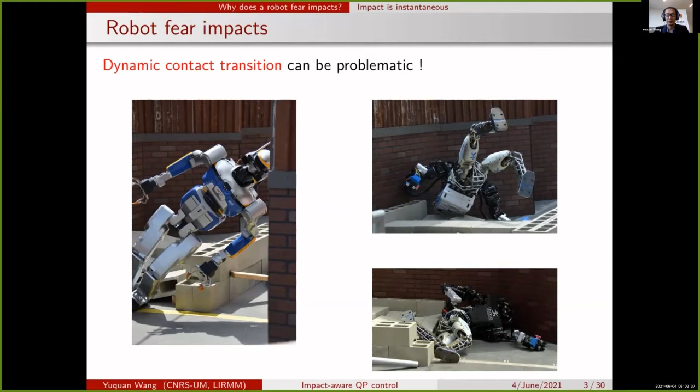Hence, the state of the art is more like this: the robot would establish contacts carefully with close to zero contact velocities, and sometimes with soft materials between the robot and the rigid environment.

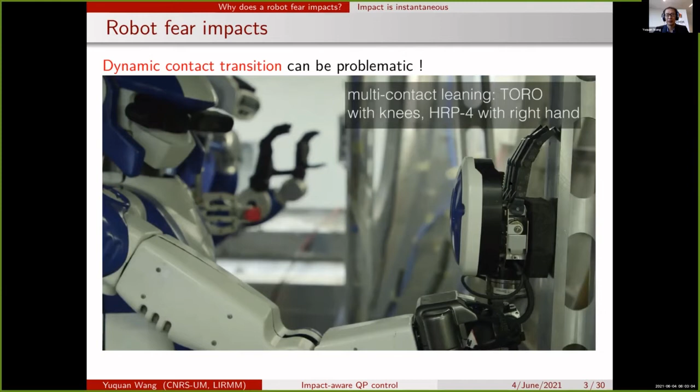So why do we need the soft materials between the robot and the rigid environment? We can have a look at what the Journal of Impact Engineering says. In this simulation example, our conclusion is that impact is too fast to be compensated. Within this time scale, we can tell from the X label, it is actually within 1 millisecond.

So if the contact velocity is up to 1.17 meter per second, for plastic materials, the peak force can reach up to 4.5 kilonewton. This is forbiddingly high. And this is in simulation.

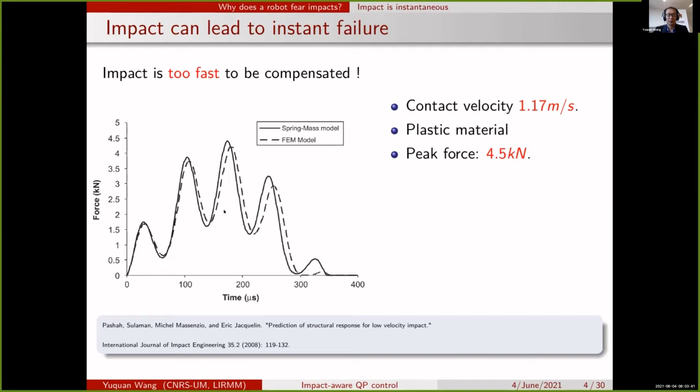So let's have a look at what's going on with the real experiments. We didn't try 1 meter high contact velocity, but only 18 centimeter per second contact velocity. But still, we received 120 Newton peak impact force in the experiments. Over 10 iterations, we can see that the force profiles are consistent.

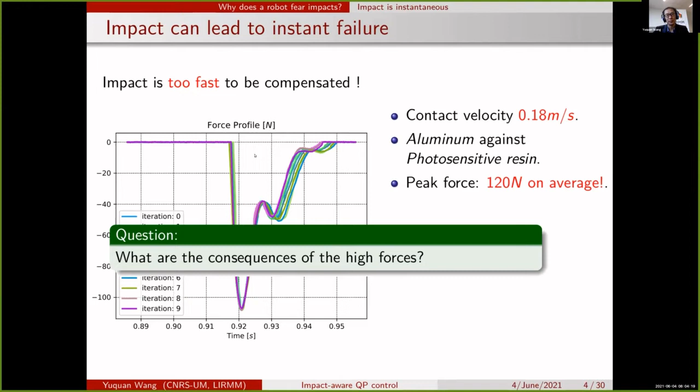So these peak forces, how harmful are they? What are the consequences of the high forces? Basically, our conclusion is that these forces will damage hardware, for instance the electric motors, the fragile harmonics between the gearbox and the motors, and then the contact outcome is not determined. In this case, the impact leads to the over-torque of a joint, so the robot state immediately becomes infeasible.

This is typical when the environment is rigid and the contact location is unknown. And when we have underactuated robots, we also need to consider the standing stability, otherwise the high impact velocity would lead to instantaneous falling. In this case, the contact velocity is 0.5 meter per second. We did not put this in practice, otherwise we would for sure damage our humanoid robots.

So due to these reasons, the state-of-the-art typically avoids impacts or uses close to zero contact velocities. Hence, our objective is to control the impact process so that the controller knows exactly the outcome of the impact dynamics.

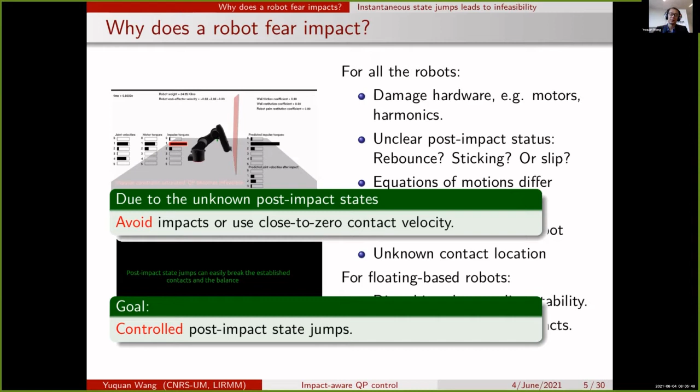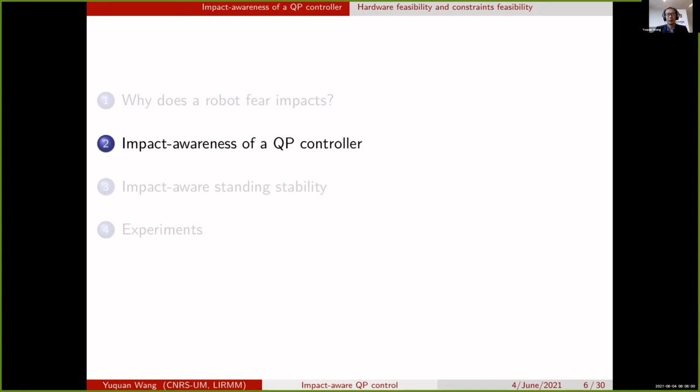Then, in the next section of the presentation, I will introduce you to how we propose to do it, and what are the details of our method.

So to quickly recap, for hardware feasibility we consider the limited joint velocities and limited joint torques. And for underactuated robots, such as a humanoid or a quadruped, we also need to address the standing stability. For all these aspects, we can use modular constraints to describe them. Basically, these joint velocity constraints, joint torque constraints, or standing stability constraints would reflect reality. And thanks to the modularity of the constraints, we can seamlessly integrate these aspects into our state-of-the-art reactive controllers.

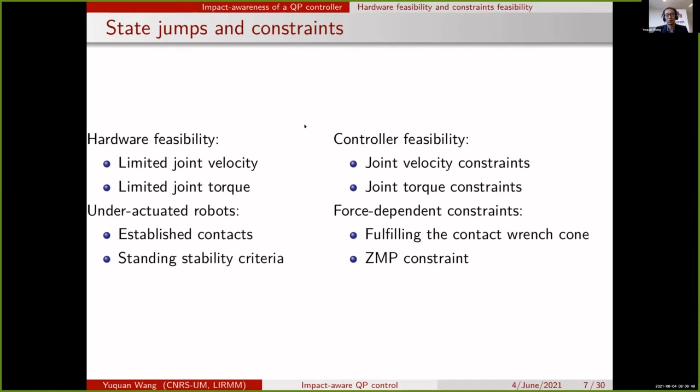However, these constraints do not consider impacts explicitly. So we propose to, on top of these constraints, constrain the post-impact state. Say after the impact, the joint velocity, for instance, needs to be below certain bounds.

We can simply rewrite the post-impact state as the pre-impact state plus the state jump. The pre-impact state is a function of the controller decision variable. For instance, the most popular choice is the joint acceleration.

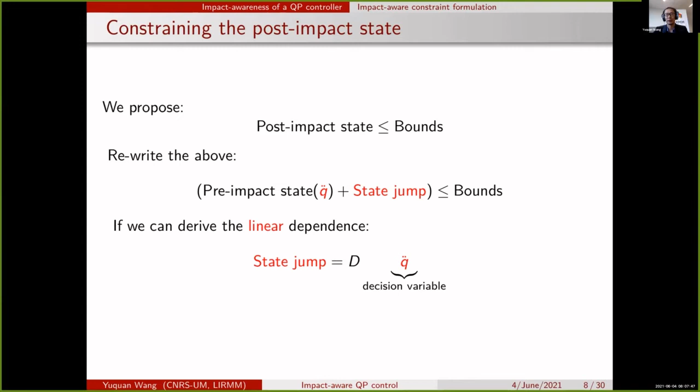Our goal is to rewrite the state jump also as a function of the decision variable, for instance, joint accelerations. If we can manage this, the impact process will be a controlled process, and all impact-induced state jumps will be known by the controller and handled consequently. Hence, the QP controller will be impact-aware in the end.

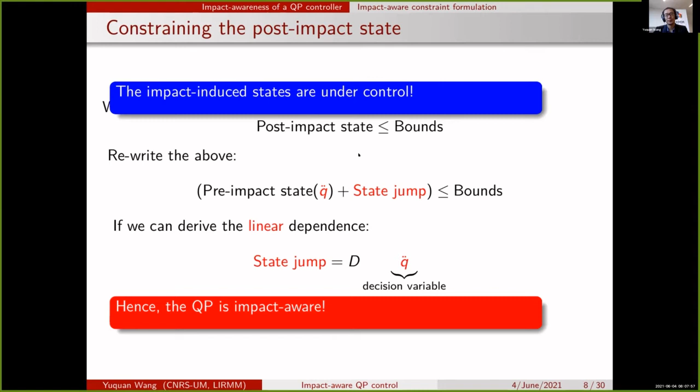So let's examine how we derive the state jumps as a linear function of our controller decision variables. Let's have a look at this simple example. Given a contact surface, which is the green area, we have the pre-impact velocity, which is the black arrow, and the surface normal. Then we can easily derive the post-contact velocity using the kinematic restitution.

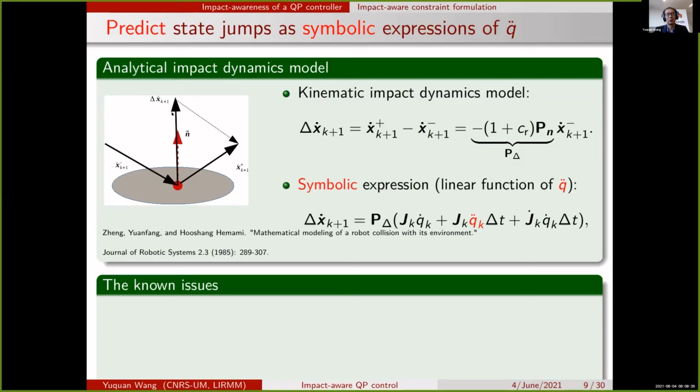Taking the difference of these two arrows, we get the contact velocity jump. Based on this simple relation, multiplying by the equivalent mass, we can conclude the impulse.

Despite this approach has been adopted for many applications in one way or another, typically in the working community, this approach has well-known issues. For instance, in this example, we used a Panda robot to impact a planar surface, so we only have the orthogonal contact velocity and zero tangential contact velocity.

So in this case, because we have zero tangential components, the impulse should have zero entries, should have only non-zero entries along the contact velocity. Whereas these products of the Jacobians and the inertia matrix in practice have non-zero off-diagonal elements. So for this Panda robot configuration, we got these values, and this means that this multiplication would lead to a 3-element vector where all the elements are non-zero.

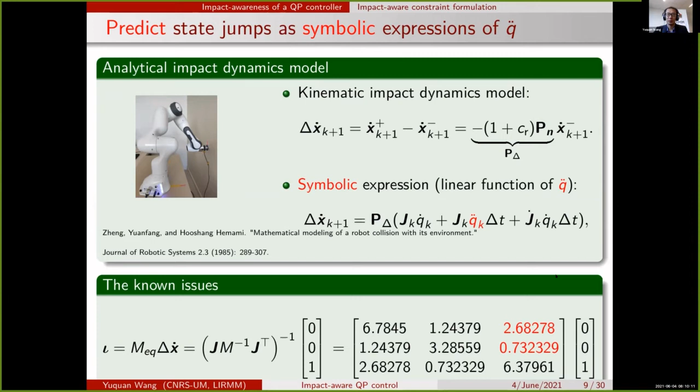So this is obviously not true and not desired. These limitations motivate people to develop more advanced impact dynamics models. For instance, back in 2000, Stewart already discovered these issues and summarized them in his seminal paper. These issues have also been recently reviewed by Featherstone.

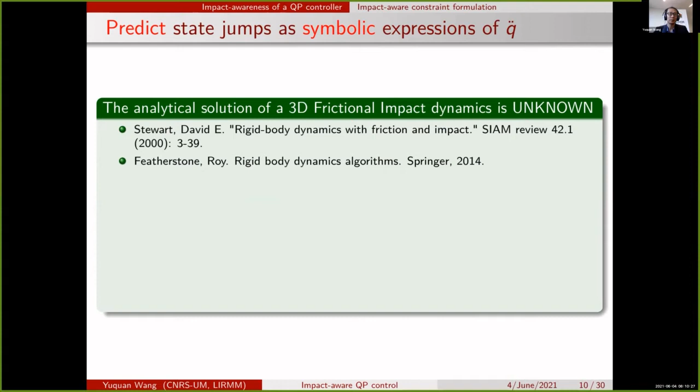As presented by Yan Bin in the morning, he developed the graph-based approach for planar impact models and three-dimensional impact dynamics models. Despite the planar impact dynamics models having been successfully applied on robots, with an analytical solution, the three-dimensional analytical solution is still not known. This is double verified by Michael Posa and David Remy. Especially for legged robots, the impact or collision outcomes can be ambiguous and the result may not be unique.

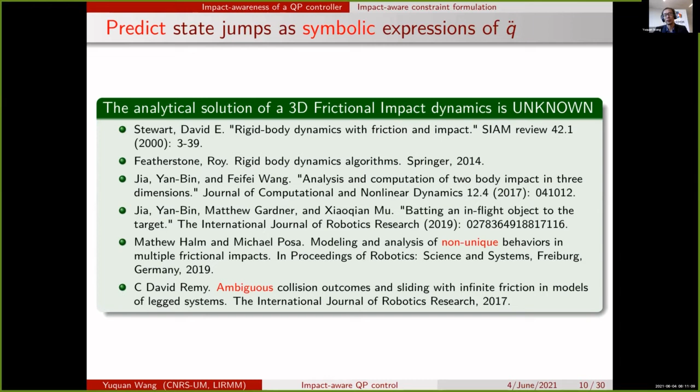Whereas, despite these difficulties, we can choose one's favorite impact dynamics model to write the state jump as a function of the controller decision variable. So let's have a look at a more intuitive example.

For instance, the joint velocity constraint. Typically, we restrict the joint velocity below certain bounds, and the joint velocity can be rewritten as a pre-impact joint velocity, which is a function of the joint accelerations, plus the state jump.

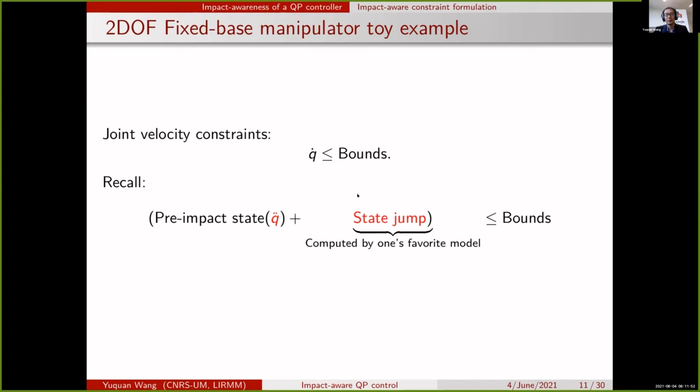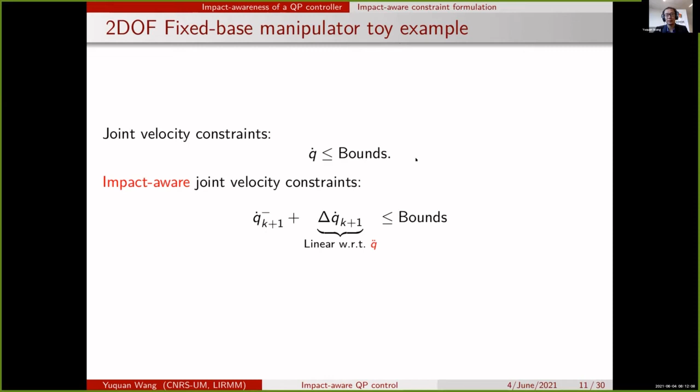We can rewrite the state jump of the joint velocity as a function of the joint acceleration, and then we can constrain the post-impact joint velocity below the predefined bounds. Typically, this is the hardware limit specified by the manufacturer.

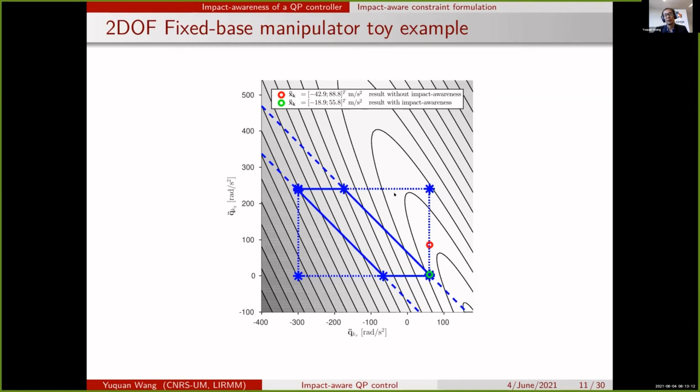So with the new constraints in practice, I will show later with experiments that we can achieve much higher contact velocity than the close-to-zero state of the art.

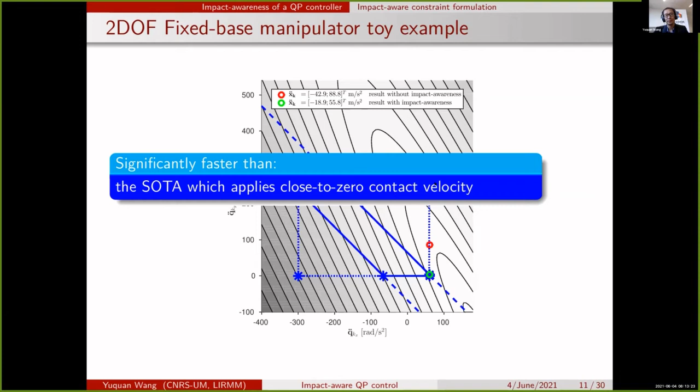So let's have a look at a simulated video. We documented the result in RSS 2019, and the Python implementation is openly available on GitHub.

If we do not consider impact dynamics and the robot just collides with the wall, some of the joints will over-torque and the robot hardware will be damaged. Whereas if we apply the approach that I presented, we can explicitly consider the state jumps and safely land the impact on the unknown wall.

By the way, whenever the impact-aware constraint is activated, we always assume the impact can happen at the next iteration. That's why the proposed method is not sensitive to the impact location.

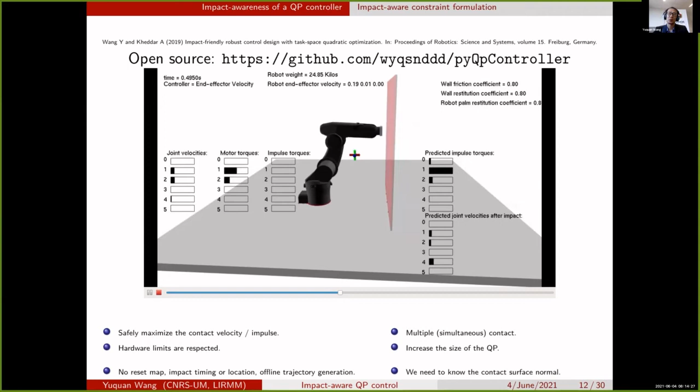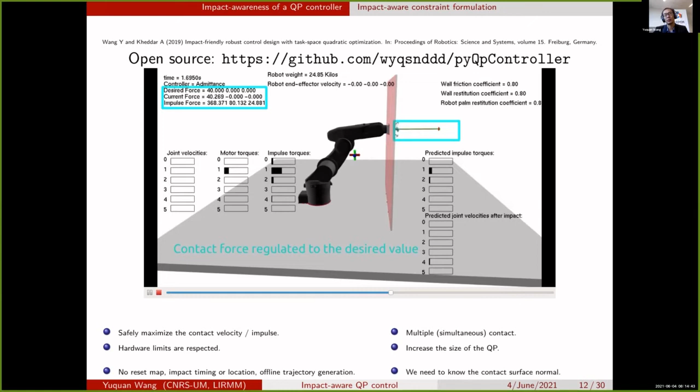If we combine the proposed control law with admittance control, we can regulate the post-impact contact force to a predefined value. So in this case, we swiftly establish the contact and regulate the contact force to a predefined reference.

Later, I will show our plots from our HRP4 robots, at the end of the presentation.

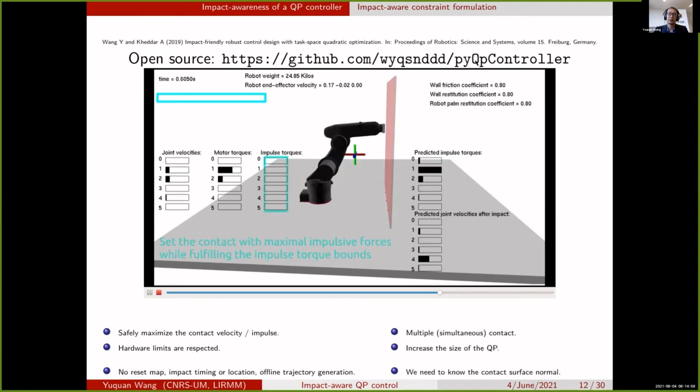We can also optimize the robot configuration to maximize the impact force, to maximize impulse if necessary.

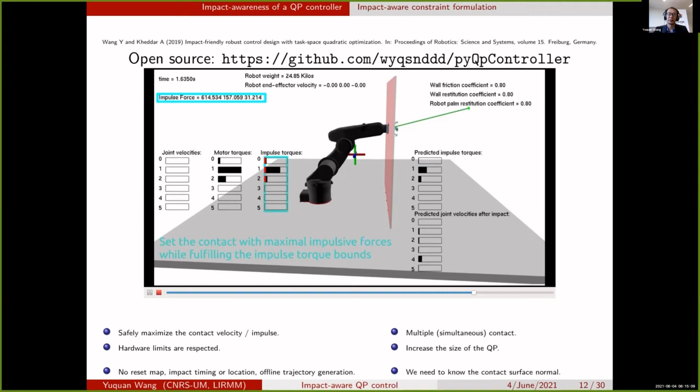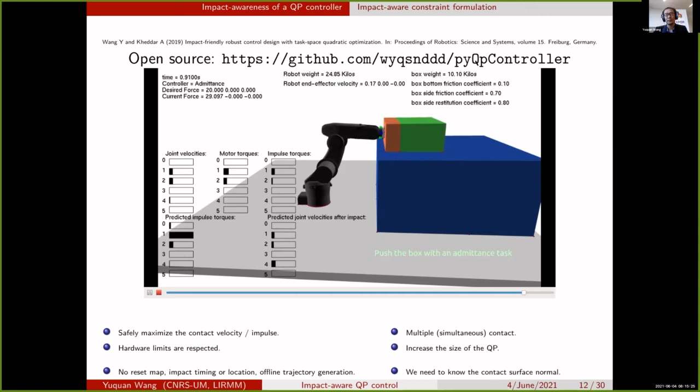We can also exploit this method in manipulation tasks. For instance, if we would like to push a box with a swift motion, we can establish contact without stopping and using an admittance controller, but rather directly apply the impact to push the box without damaging the hardware or breaking the constraints.

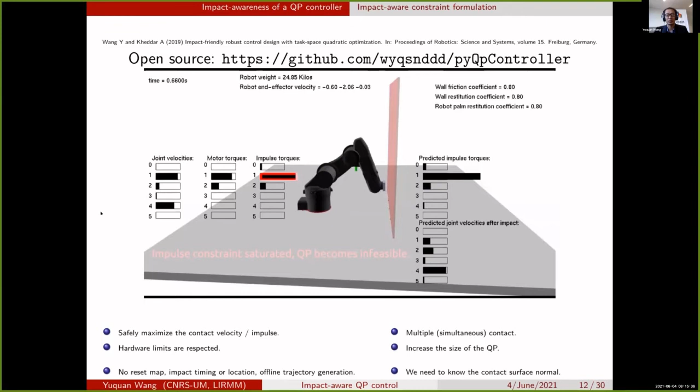So these are the aspects we considered for fixed-base robots. What happens if we want to use the proposed approach on humanoid robots or underactuated robots?

Basically, we need to address a new standing stability criteria.

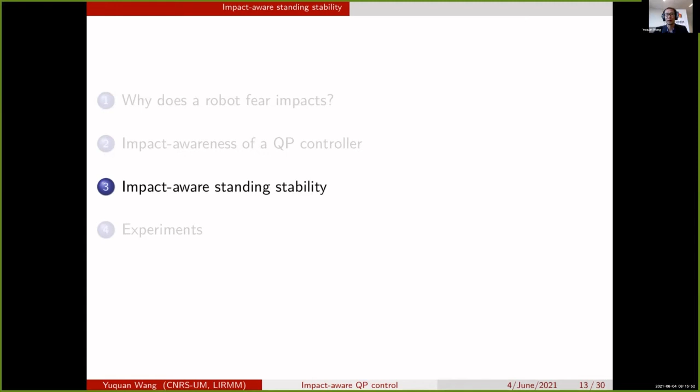Suppose a humanoid robot is going to break a wooden piece with karate. Initially, the robot raises a hand, then uses significant contact velocity to approach the wooden piece, and finally sets the contact dynamically.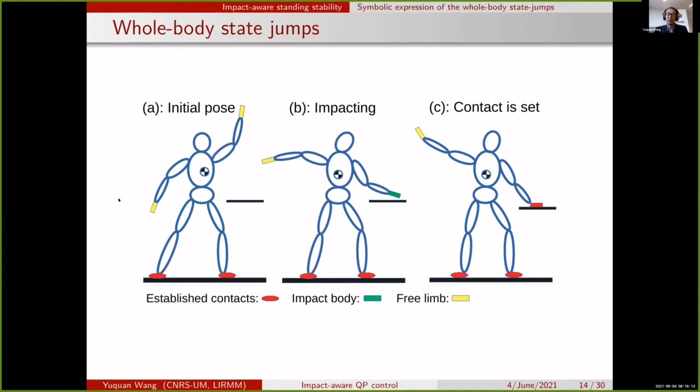This dynamic process would lead to an impulse at the pole, and then this impulse would propagate along the kinematic chain to the center of mass, as presented this morning by Professor Nanchif and Patrick.

Typically, humanoid robots are joint-position controlled, so the joints are kind of locked. We can observe significant floating base velocity jump, but relatively minor joint velocity jump.

So our question now is, if we move to humanoid robots, how do we compute the centroidal momentum jump?

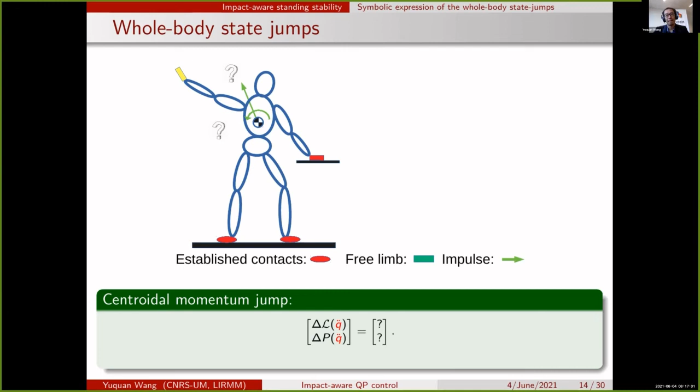We adopted the planar frictional impact dynamics model by Yan-Bin Jia, published in 2019, that is used in the robot batting example. We have an open source implementation, and interested readers are welcome to use it, test it, and report bugs if found.

We found that, thanks to the analytical solution, the running time of this model is quite fast -- only a matter of a few microseconds.

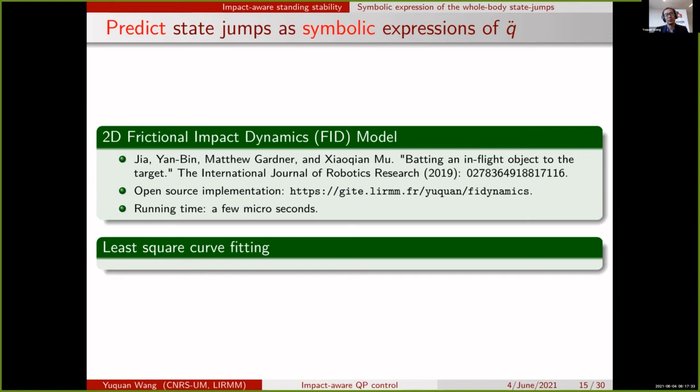This allows us to do something interesting, such as least square curve fitting. This means that every time we give a contact velocity to the frictional impact dynamics model, we can compute the impulse really, really fast.

This means that if we feed the frictional impact dynamics model many contact velocities, we can approximate the following linear relations. On the left-hand side are the outcomes of the frictional impact dynamics model, which are the center of mass velocity jump. On the right-hand side, we feed in the contact velocities, and the green and blue parameters can be approximated really efficiently.

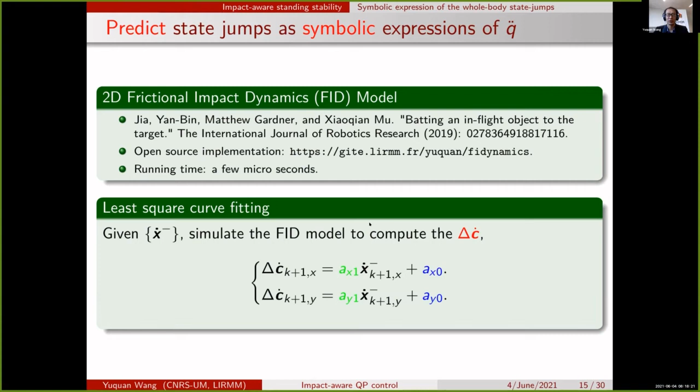Here are two examples we collected from the simulations. Along the x and y axis, we can, within each control sampling period, perform such approximation thanks to the fast computation time.

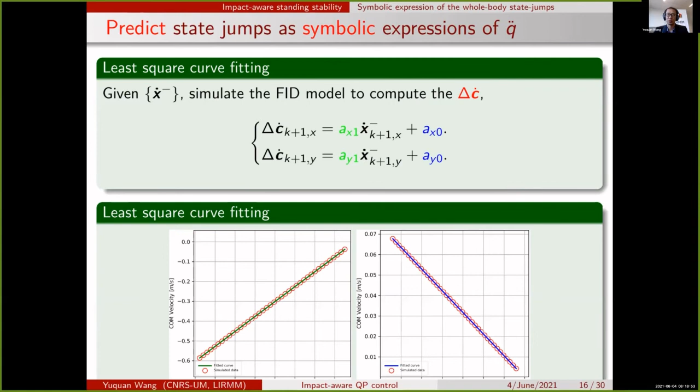With this approach, the center of mass velocity jump will be a known process to the robot controller, thanks to this gradient.

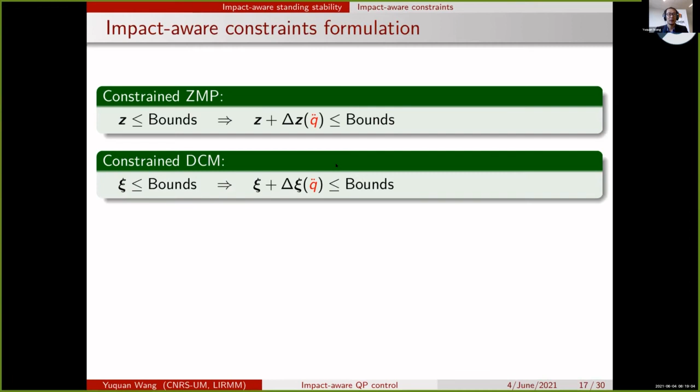A similar strategy can be applied to the ZMP, to the divergent component of motion, to the center of mass velocity, and also to the angular momentum, which is very important, for instance, in the backflip simulation by Professor Nanchi.

With these state jumps, we can seamlessly integrate them into the whole body QP controller.

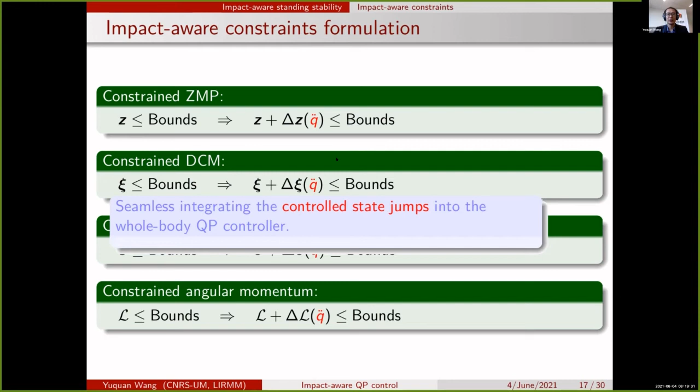Given these state jumps, our next question is how do we exploit them for standing stability criteria? The state of the art says the ZMP should stay within the support polygon.

In this example, the humanoid robot HRP4 has two coplanar contacts, and it's going to push the unknown wall with impacts. So we can have a look at these experiments here.

And the contact velocity we established in this case is 11 centimeter per second. And we can see that the ZMP is well bounded within the support polygon. And the robot can finish the entire control cycle without breaking anything.

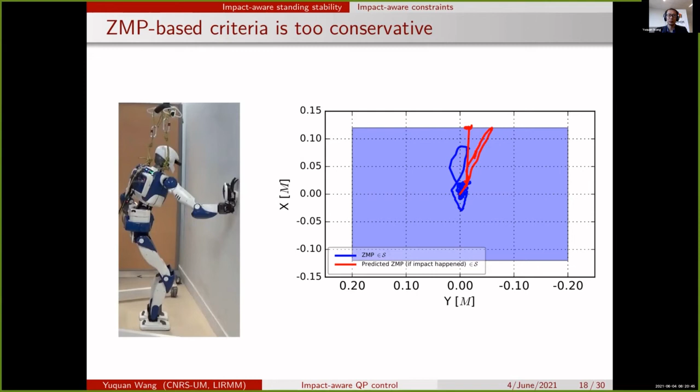I would not say this experiment is very impressive because the contact velocity is not as high as we are aiming for. As I said many times, we would like the humanoid robot to behave swiftly as humans. So what we do is we exploited the capture region approach, focusing on the 0-step capture region.

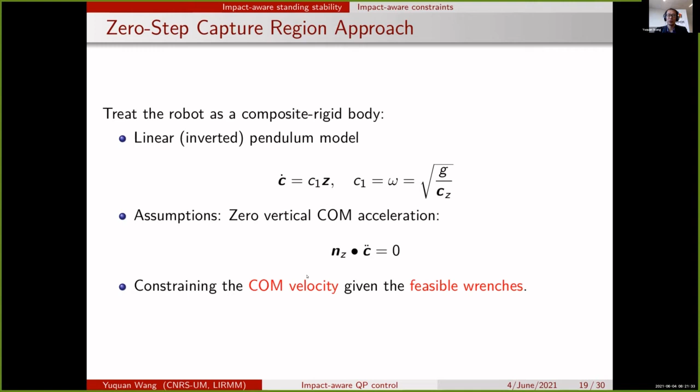So basically, we adopt the linear inverted pendulum model. This allows us to work on the center of mass velocities rather than the ZMP. And the biggest assumption we adopt is that we restrict the vertical com acceleration to 0. Given these two assumptions, we can compute the feasible center of mass velocity jump given the feasible wrenches that we can regulate from the sustained contacts.

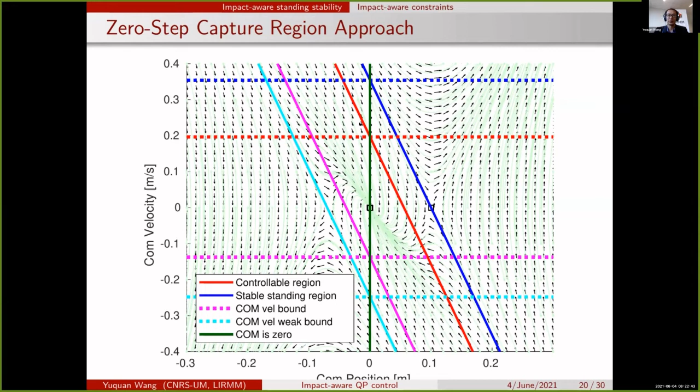And we are going to exploit this point in the experiments that I'm going to show. And then with slightly different controller configurations, we can have different areas, but the idea are the same.

So this 0-step capture region approach has been well exploited by different researchers, by Jerry Pratt, by Sugihara, by Benjamin Stephens, and more recently by Li Zhibin. Whereas all of these approaches focus on planar contacts, the striking difference is that we are going to work on non-coplanar contacts, and we consider ourselves as the first to derive 0-step capture region for non-coplanar contacts.

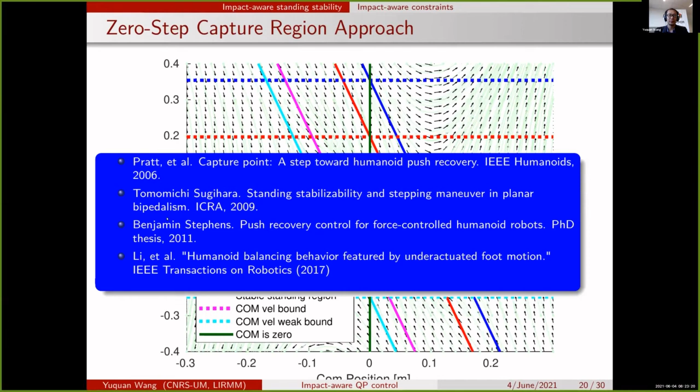So here is an example. The robot is applying the impact with the right palm, and then the red arrow shows the post-impact center of mass velocity jump. So here I would like to use this video to visualize how much the non-coplanar foot contacts can affect the affordable contact velocity and the post-impact com velocity jump.

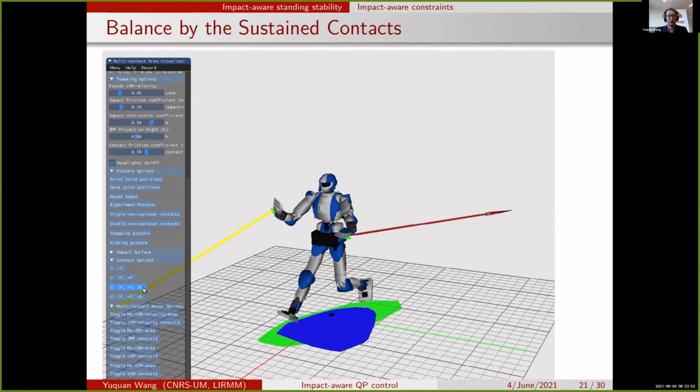So this changes - when we add the left palm as a sustained contact, we can see that immediately the blue area, which is the center of mass feasible area, increased drastically, and the light green area is the ZMP area. Both of them can increase if we have one more sustained contact. So one more sustained contact means that the resultant feasible contact wrenches on the center of mass will be significantly higher than merely 2 contacts.

And if we remove the left palm contact, we can see the shrink. And then if we move the location of the feet contact, we can also observe the change of these feasible areas. And consequently these areas would affect the post-impact, the maximum feasible post-impact com velocity jump. And thanks to the linear inverted pendulum model, we can project the feasible com velocity area.

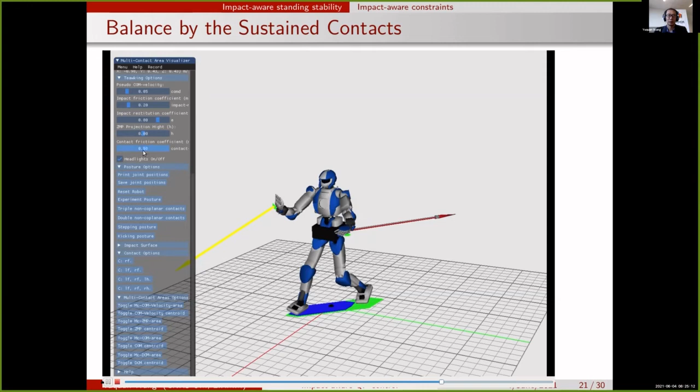And the reason why the red arrow is the maximum post-impact com velocity - it is found at the boundary of the feasible com velocity area.

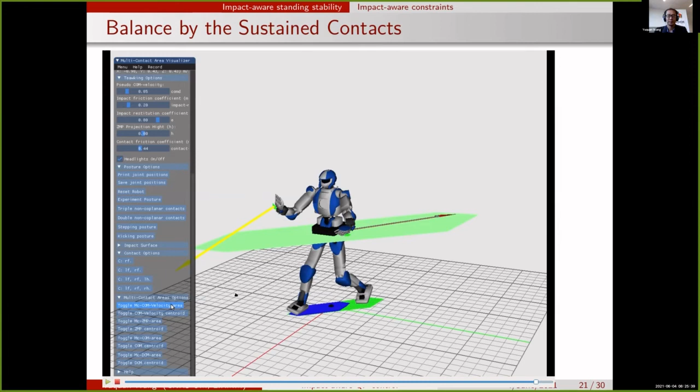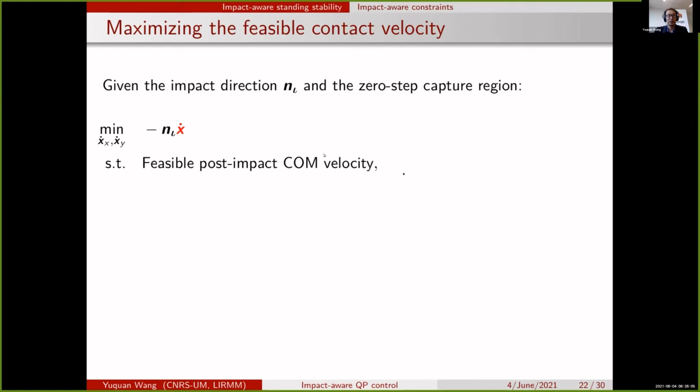So how do we find this maximum post-impact center of mass velocity? Basically, what we are doing is a simple optimization problem. We would like to maximize the contact velocity along a given impact direction. And then we compute the feasible post-impact COM velocity area thanks to the projection approach, and apply the known impact dynamics gradient.

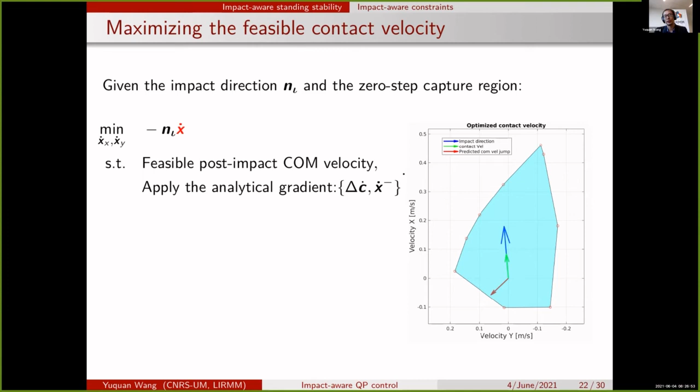So we apply this principle. If we apply this principle to different stances, we can find the affordable contact, the maximum velocity for different useful practical stances. For instance, in this case, the robot has two non-coplanar feet contacts, and it is going to apply impact with the right palm, and then we can see the post-impact center of mass velocity jump is found at the boundary here.

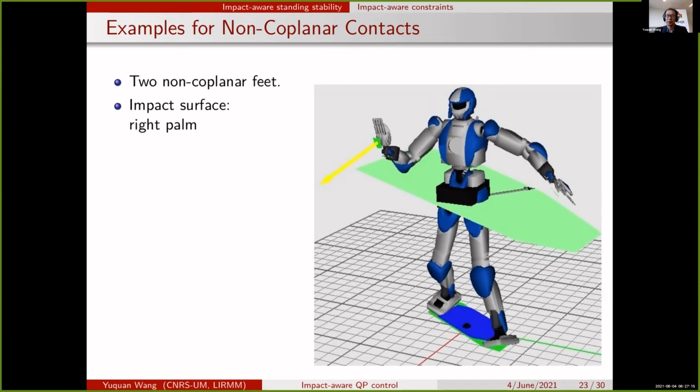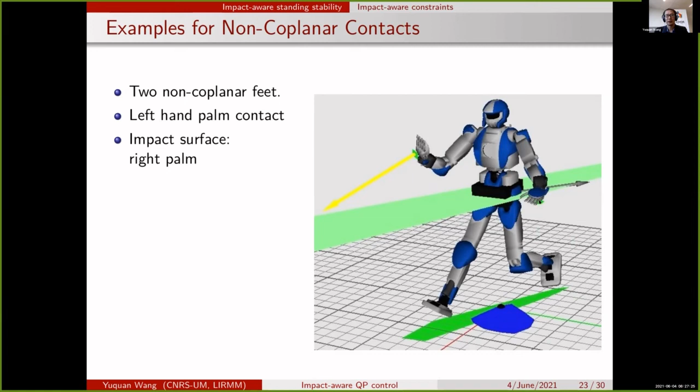And if we have three contacts, we have a different situation. In this case, the left palm is also considered as a sustained contact. More interestingly, the robot in this case is performing a stepping task. So there is only one sustained contact, which is the right foot. The left foot, and the robot is stepping with the bottom surface of the left foot. From the top view, we can see the post-COM velocity jump is also found at the capture region.

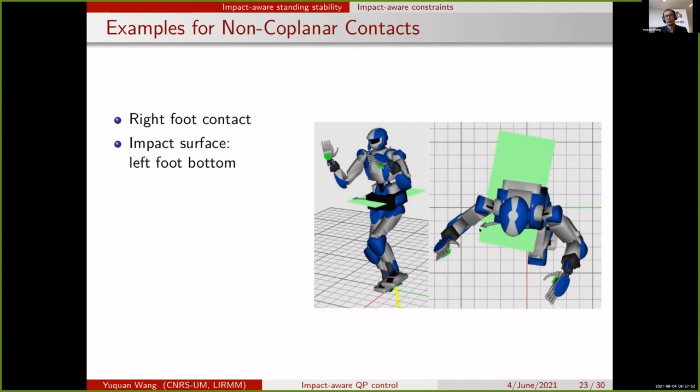And then we have one more stance with the kicking task. Basically, the robot again has one sustained contact with the right foot, and then it is using the left toe to kick. In this case, the post-COM velocity is found at the capture region in the back.

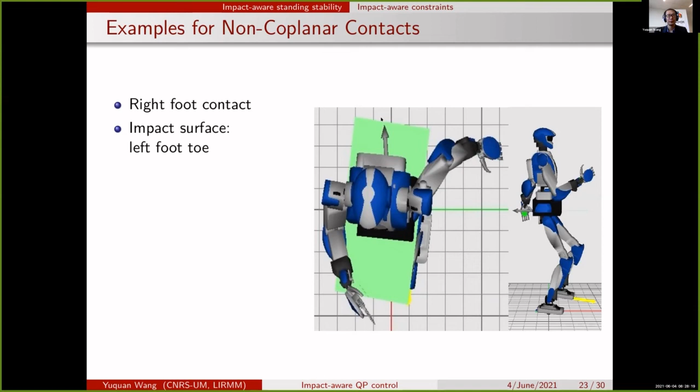Okay, so let's move on to some experiment results. Basically, with the proposed approach, we can swiftly grab objects for manipulation purposes. In this case, the contact velocity is 15 centimeters per second.

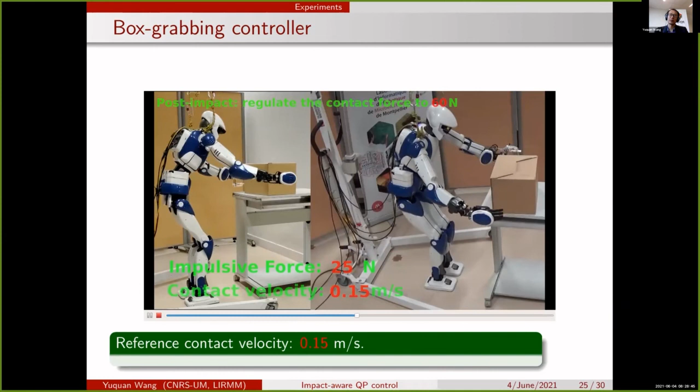And the interesting thing is that the robot can swiftly lift the box and put it down. In this case, the box is actually empty due to the limited payload of the HRP4 robot — it is only half a kilo for each end effector.

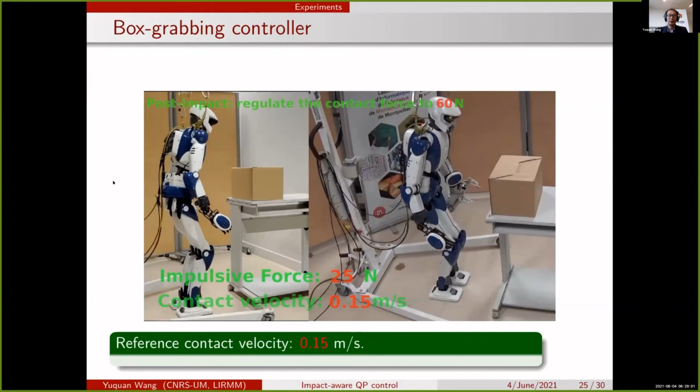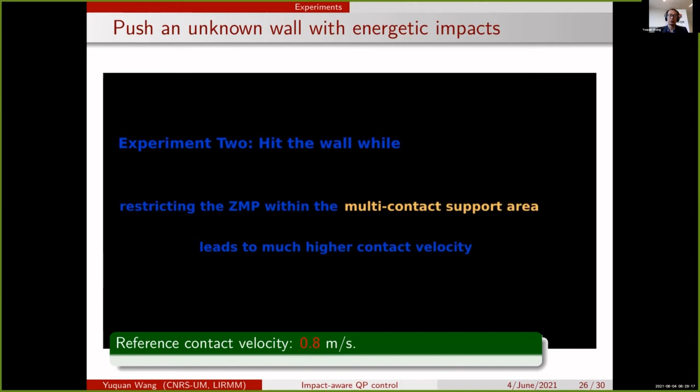And then we have another push-wall experiment with significantly higher contact velocity. In this case, we set the reference to be 80 centimeters per second, and the controller, thanks to the proposed approach, can autonomously find the feasible contact velocity.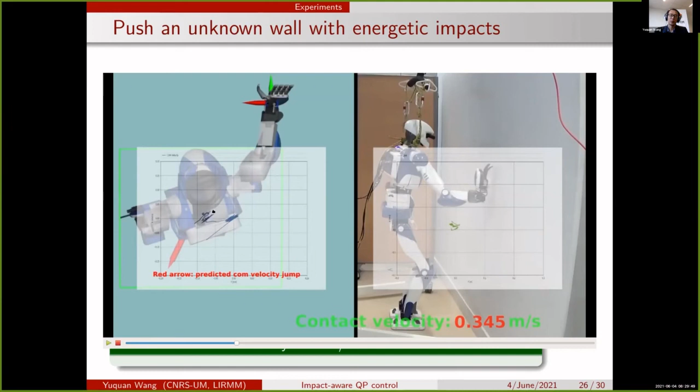Yes. So basically, on the right, we will see shortly, the ZMP will jump outside the support polygon, but the CoM velocity on the left will be bounded. So that's why the robot did not fall despite the significant contact velocity.

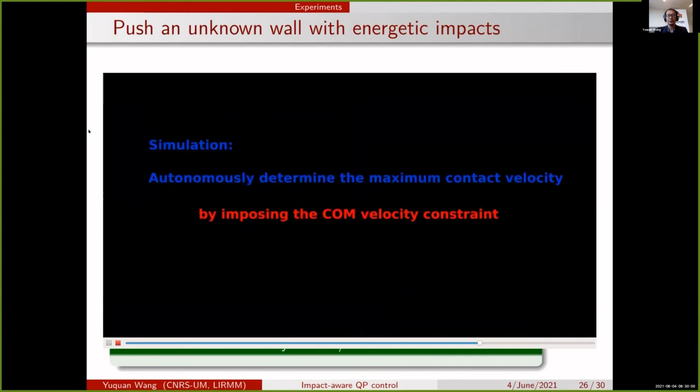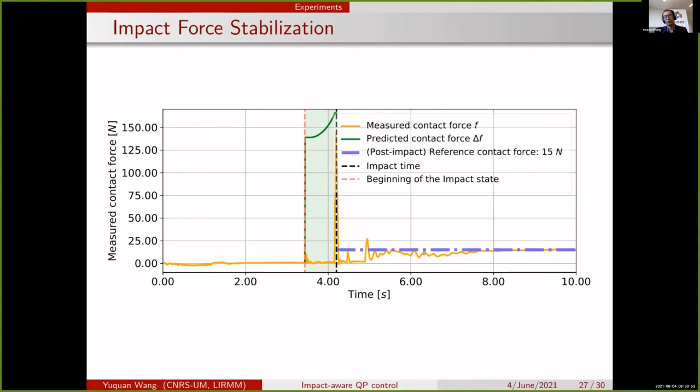And after the impact, we switched to admittance task. Then the reference is 15 Newton, and we can see that the force measurements converge to the predefined contact force reference.

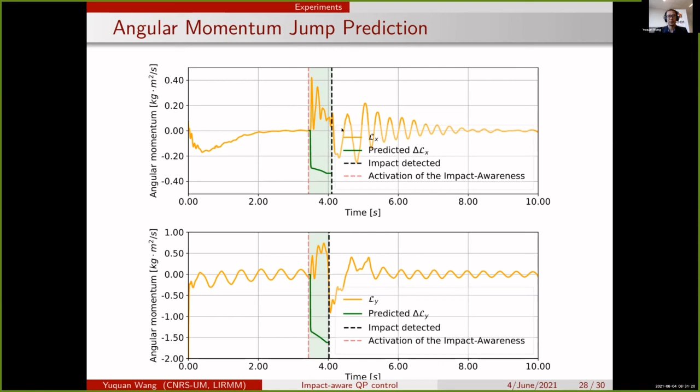And then to summarize, I would like to say that the parameters, especially the frictional parameters of the sustained contacts and also the impact, can significantly influence the outcome of this impact. So basically, we would like to use this interactive graphical user interface to highlight these effects.

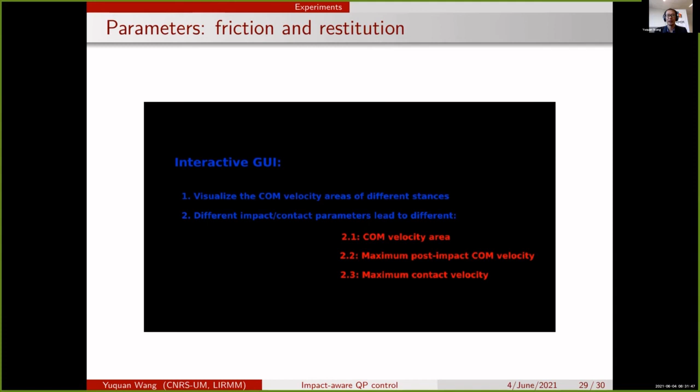So basically, the yellow arrow indicates the impact velocity, and the gray arrow indicates the post-impact CoM velocity jump, and this light green area corresponds to the feasible CoM velocity area, that is the capture region for non-coplanar contacts.

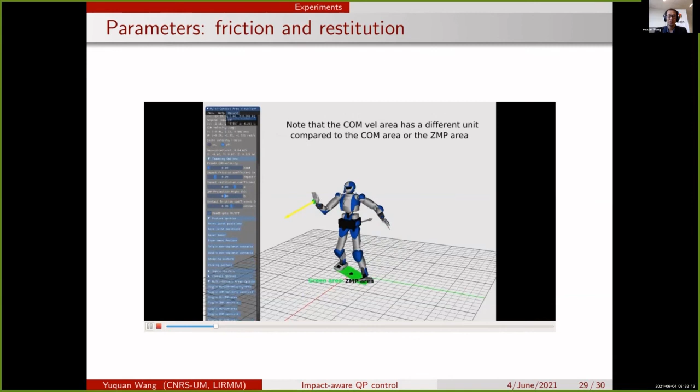And if we change the friction coefficient of the sustained contacts, we can see that the capture region would change accordingly, and also the impact velocity increases and the post-impact CoM velocity would increase, and is always found at the boundary of the capture region.

And here is another stance. We have three contacts, including the left pole. And if we decrease the friction coefficient, we can see the capture region decreased significantly.

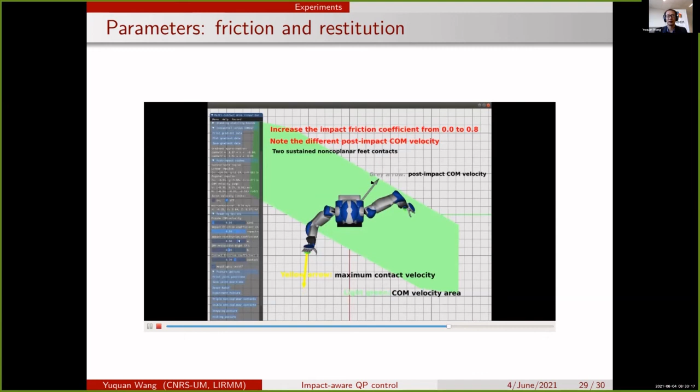And if the friction coefficient of impact itself changes, we can also observe the variation of the post-impact center of mass velocity. Basically, it slides along the border of the capture region.

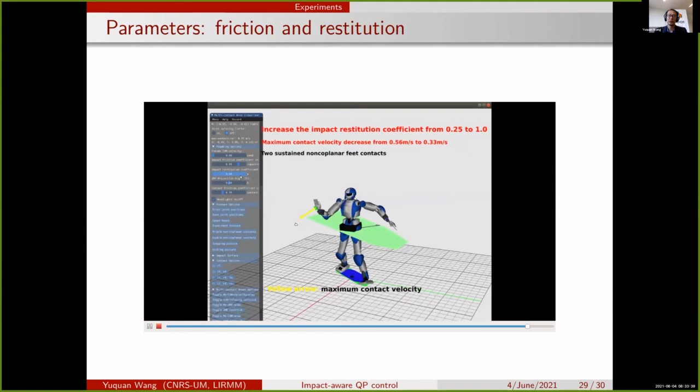And if the restitution coefficient changes, we can observe a similar effect. A higher restitution coefficient would lead to a smaller contact velocity.

Now I presented all the experiment results, and let's draw the conclusions. Basically, the idea is that we propose to

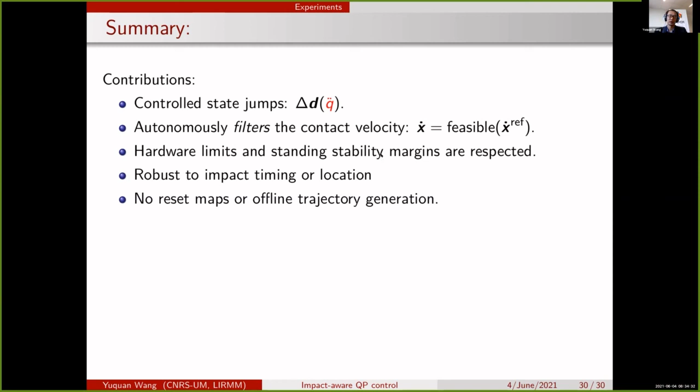Integrate this controlled state jumps into the reactive optimization-based robot controllers. This means that we can autonomously filter the contact velocity, despite the reference velocity could be significantly high. For instance, in the experiments, we used 80 centimeter per second reference, but in the end, the robot found 34 centimeter per second is feasible and friendly. And all the hardware limits and standing stability margins are respected, and our approach is robust to impact timing or location. And we do not need to resort to reset maps or offline trajectory generations.

And in the future, we would like to exploit the 3-dimensional frictional impact dynamics model, and we would like to refine impulse propagation along the kinematics tree. And as we just noticed, the parameters, friction coefficient or coefficient of restitution, have significant effects on the impact-induced state jumps, and we need to be careful with these parameters. And we also would like to investigate the effects of the tangential impulse.

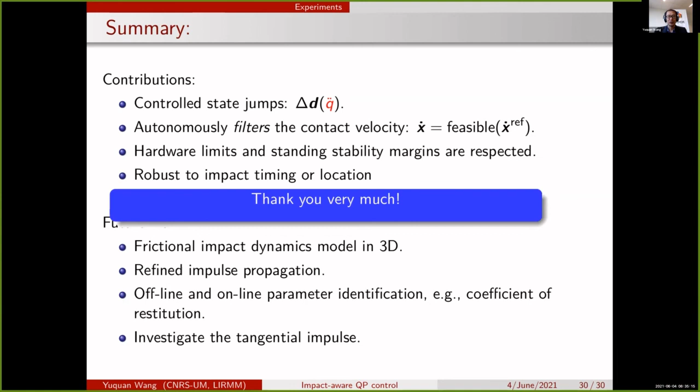I'm wondering that, are there any questions? Can I ask you something? Oh, yes, sure. I was wondering, very nice work, and I was wondering,

Are you going to make use of those redundant degrees of freedom? Because you can use opposite force, you can project an opposite force at the center of mass, and in this way, you can increase your impact velocity. For example, by moving, if you impact with the right arm, you can move the left arm in the opposite direction, and in this way, you will generate an opposite force at the center of mass. Have you considered it? This is one question, and another question.

I think in my studies, the pre-impact configuration is quite important. So I didn't hear about this, how you think about this pre-impact configuration. And one final question, in your movie with the box, the whole body was shaking a little bit. I was wondering, why is this? So, sorry, 3 questions, maybe too much.